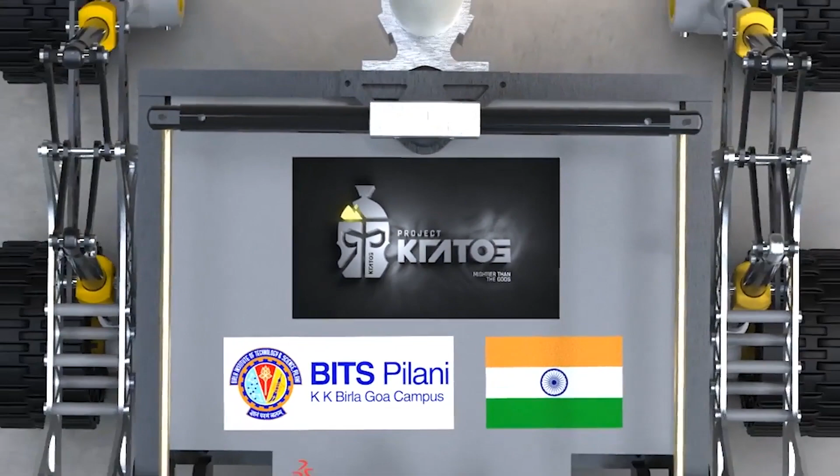We are Project Kratos from Birla Institute of Technology and Science, Pilani, KK Birla Goa campus. This is our second time participating in the University Rover Challenge.

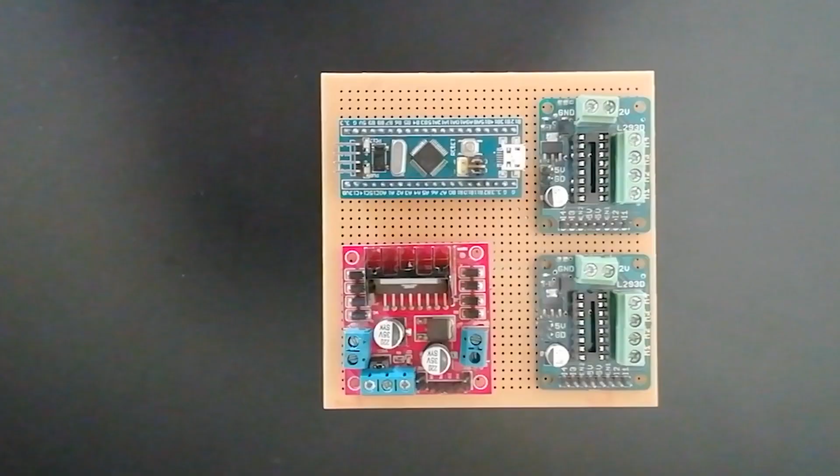Given the testing times that COVID has brought along, the team is working diligently to bring this year's rover to life. Improving upon our first team organization, Project Kratos is now divided into 7 subdivisions: Mechanical, Controls and Electronics, Power and Modularity Division, Autonomous, Communications, Life Detection Subsystem, and Data and Logistics team.

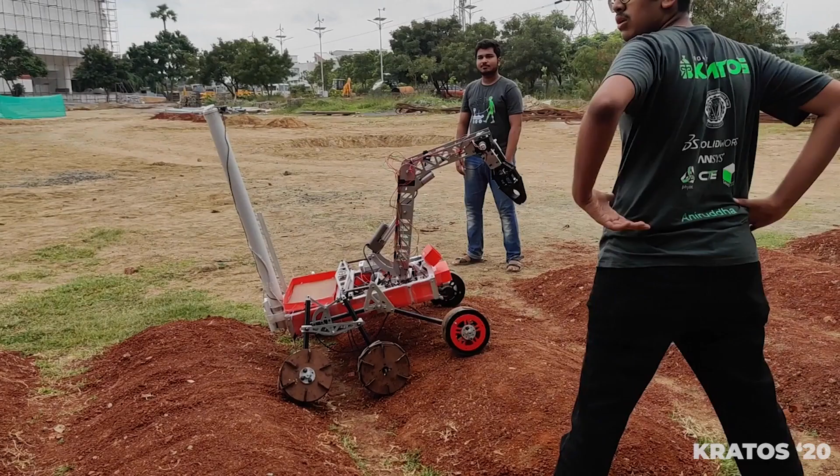The mechanical subsystem designs and manufactures the framework of the rover, the robotic arm, and the hardware for the life detection subsystem. Learning from our mistakes in the previous design, we have completely revamped the mechanical design of the rover. The box-shaped chassis will be made of aluminum sections and has a removable electronics box for easy storing, accessibility, and servicing of the electronic components on board.

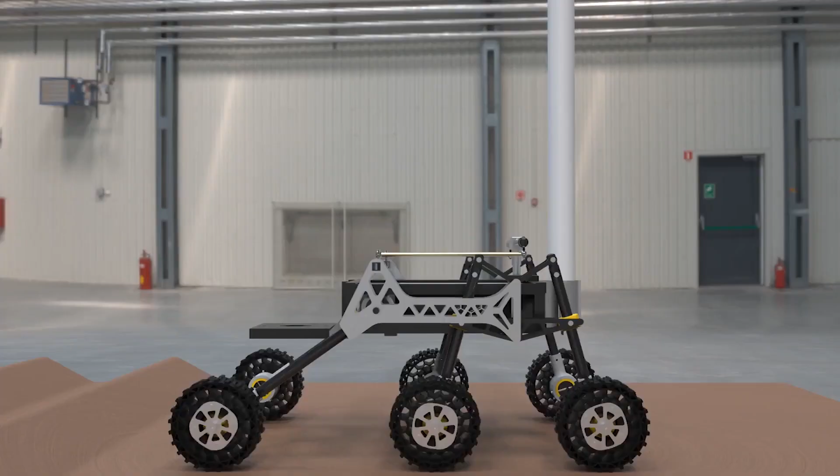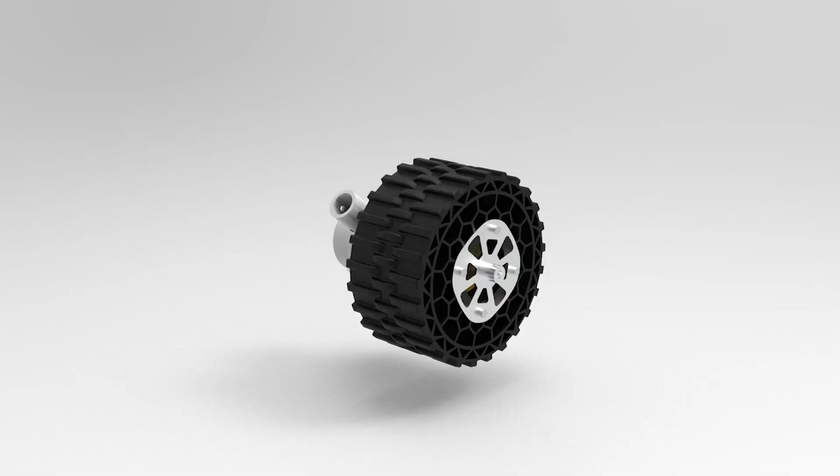A modified double lambda rocker bogie mechanism along with a differential bar averaging is used. This year, the suspension is more robust, keeping almost similar weight to the previous version. The averaging has also been pushed to the rear of the rover to increase stability. We are using a 6-wheel differential drive mechanism, and the wheel assembly has been redesigned to ensure easy assembly and protection to the drive motors.

We have redesigned our 3D printed flexible wheels to be lighter while providing the required shock absorbance. The treads are incorporated directly into the wheels to increase traction. The high torque DC gear motors enable the rover to easily climb slopes up to 50 degrees.

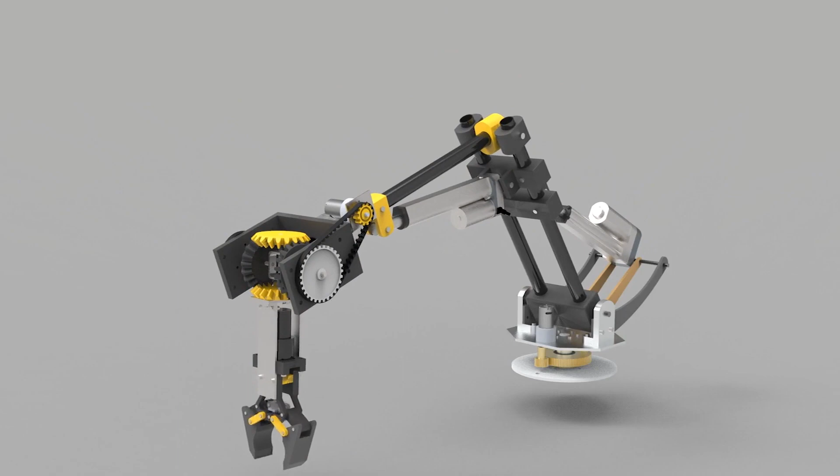Our 5 degree of freedom robotic arm has 2 linear actuators. The arm now uses carbon fiber tubes extensively, making it lightweight yet preserving strength. The base rotation has been redesigned with a spur gear drive to increase robustness.

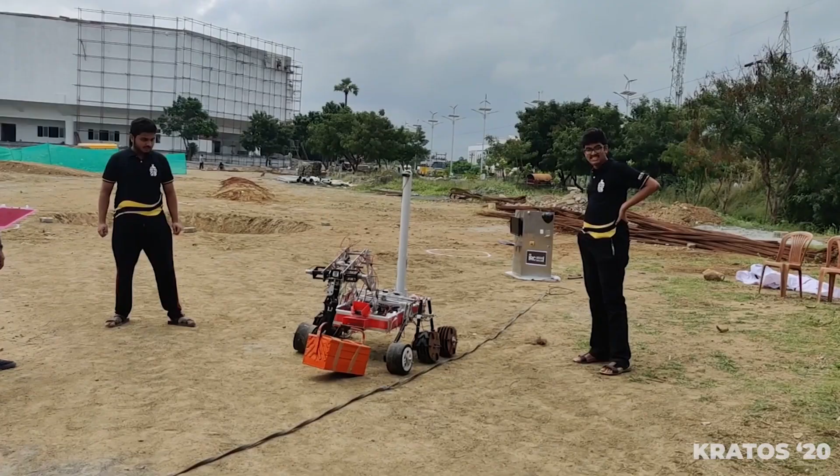The end effector is a 4-bar linkage gripper which uses a differential bevel gear mechanism for the pitching and rolling motion. It can carry loads up to 7 kg and also perform high precision tasks. Our inverse kinematics based controller on ROS allows the operator to easily manipulate the end effector position in space. This is augmented with a closed-loop feedback system from the linear actuators to meet the high precision requirements.

Last year, the autonomous subsystem completed a dynamic path planner test run on Gazebo. Since then, we have improved our efficiency using methods such as Octomap along with custom scripts to map obstacles more accurately onto a 3D occupancy grid.

To test how the system would perform during on-site tasks, we chose the gaming engine Unity. Using the ROS# library, we simulated an off-board system with an environment, camera, and GPS sensors just like the actual task. The system is also able to detect AR tags from a distance of roughly 10 meters and track them accurately.

We have also completed training a custom YOLO-based network which we plan to use to detect poles. The team is currently working on integrating the detection and path planning parts of the system to run together.

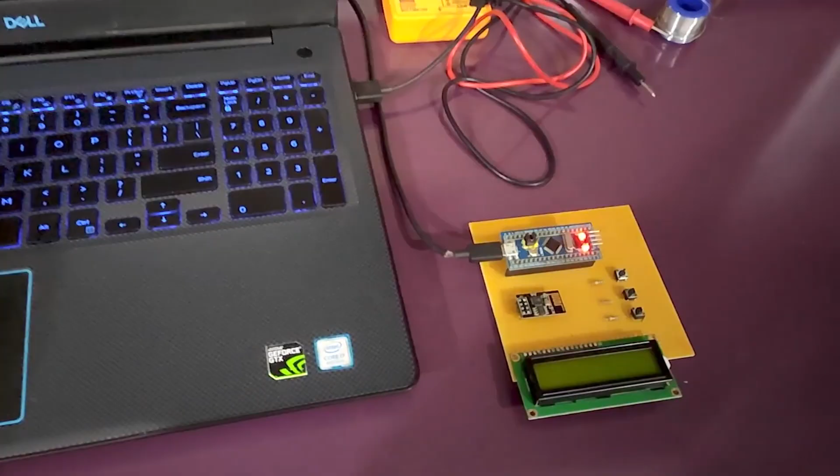Improving upon our control system, this year we are using STM32 over Arduino as our microcontroller. Our drive controller in manual mode allows the rover to be teleoperated using a joystick, whereas in autonomous mode, the rover follows the waypoints generated by the dynamic planner by computing rover velocities using the PID algorithm. This controller uses a fusion of GPS and visual inertial odometry data as feedback.

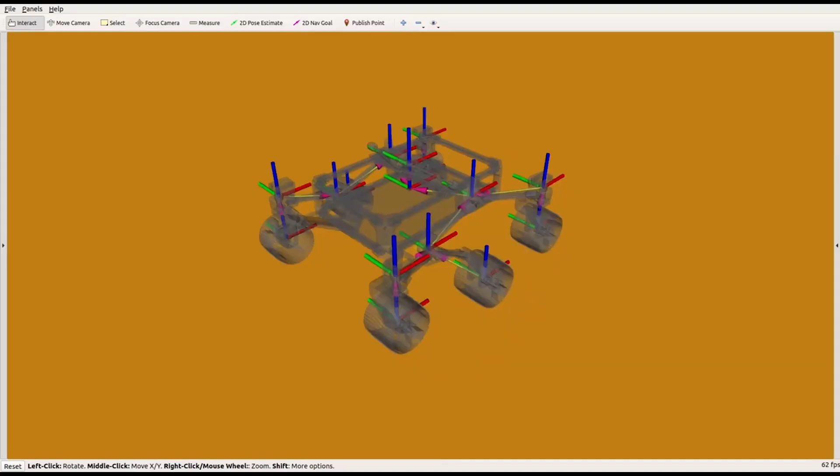The computed rover velocities are passed to STM32 over ROS serial, which computes the wheel velocities using differential drive inverse kinematics and sends them to the motor drivers over UART.

For powering all onboard components of the rover, 2 lithium polymer batteries are used with specifications decided after battery drain tests. Modular power distribution boards and PCBs are designed for easy access and quick replacement of components.

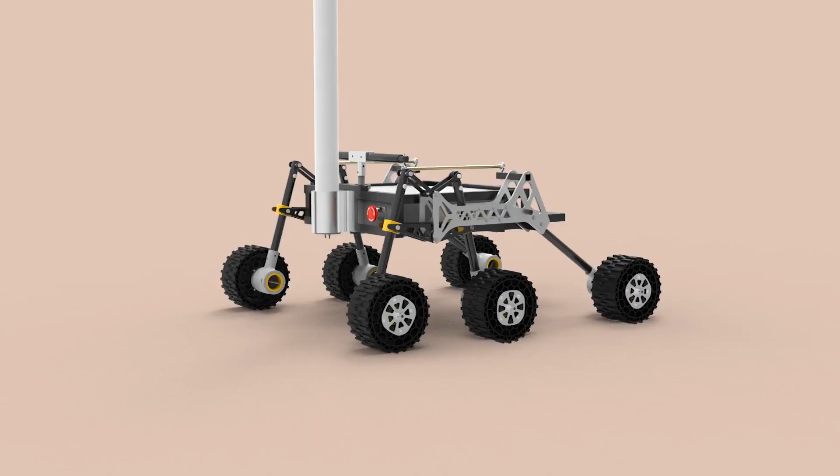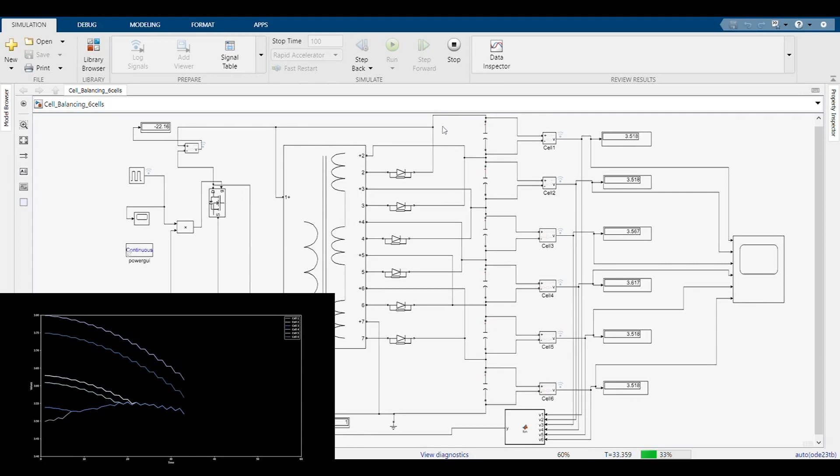For ensuring safety of the rover, an emergency stop button is installed and an adjustable current capping mechanism is implemented. Further, a battery management system is designed to regularly monitor voltage and current parameters, predict charge left in the battery, balance voltage of cells, monitor its temperature, and estimate the state of health.

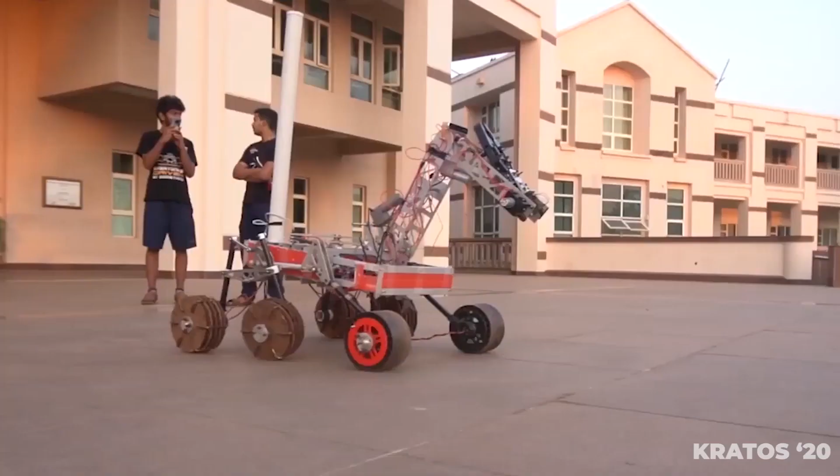For communication between the rover and the base station, we are using rocket M2 radios with an omnidirectional antenna on the rover and a sector antenna on the base station that gives a coverage area of 120 degrees. We are employing a video compression algorithm that enables us to launch multiple camera feeds from the onboard camera simultaneously with very low latency.

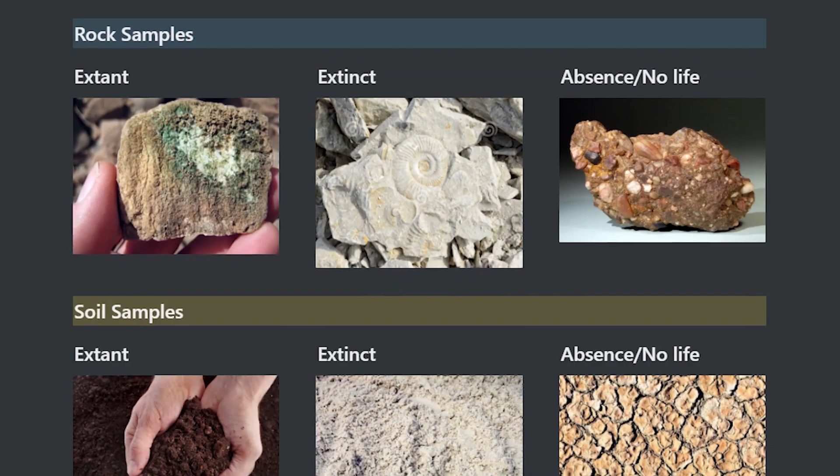The life detection subsystem focuses on classifying soil and rock samples into extinct, extant, or no life. Rock analysis is performed using the Image Processing Unit, or IPU. We use an ensemble CNN model and image processing techniques to identify and classify rocks. We use specific green and red LEDs to highlight any living colonies inside or under the rocks.

For the soil analysis, we first do a soil organic content estimation by capturing accurate soil color using the IPU and matching it with a soil Munsell chart. We also perform various habitability estimations using atmospheric sensors and soil images. Finally, we have qualitative colorimetric tests and a custom UV spectrometer for identifying specific biomolecules.

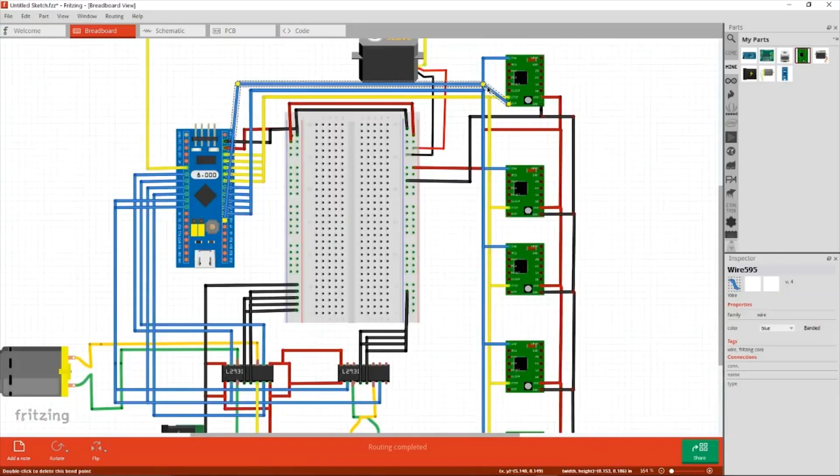For this, we have a ratchet wheel soil collection mechanism, filtration and distribution system which is contamination resistant and follows the strict no-spill policy. We have engineered a controller to actuate the stepper motors and DC motors in the soil collection mechanism. The STM32 microcontroller actuates the setup as per the joystick commands sent via a ROS topic.

We are currently working on making our rover robust and modular. This has all been possible due to the hard work of our team and the support of our seniors and professors. We hope to see you in URC 2021.